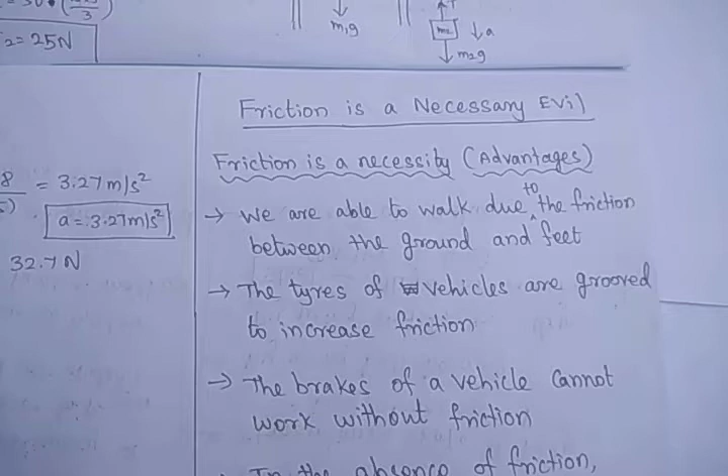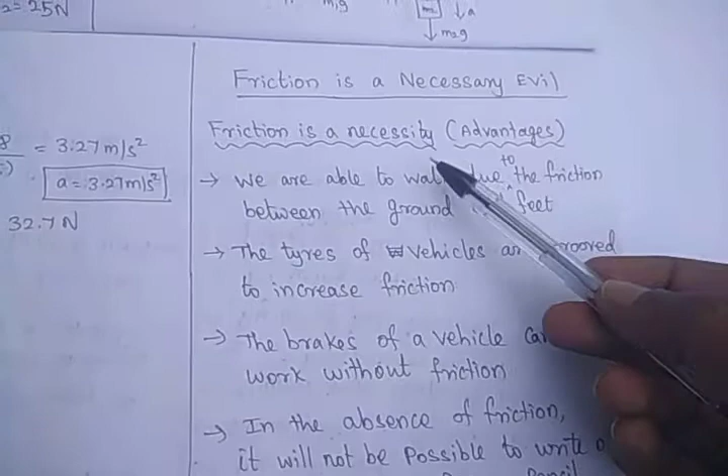Friction is a necessary evil. So today's topic is we are going to see the advantages and the disadvantages of friction. Friction is a necessity. What are all the advantages? We are able to walk only due to friction. There will be friction between the ground and our feet.

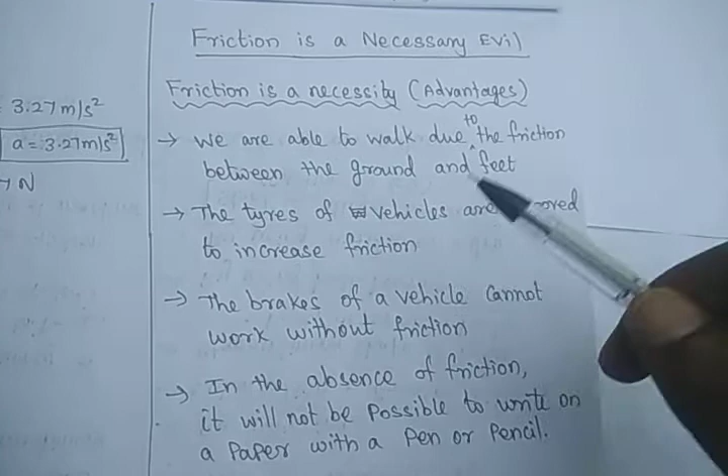Then the tires of the vehicles are grooved. Why are there designs drawn in the tires of the car or cycle, whatever it is? In order to increase the friction between the road and the tire. The brakes of the vehicle cannot work without friction. So if there is a smooth surface, there will be no friction.

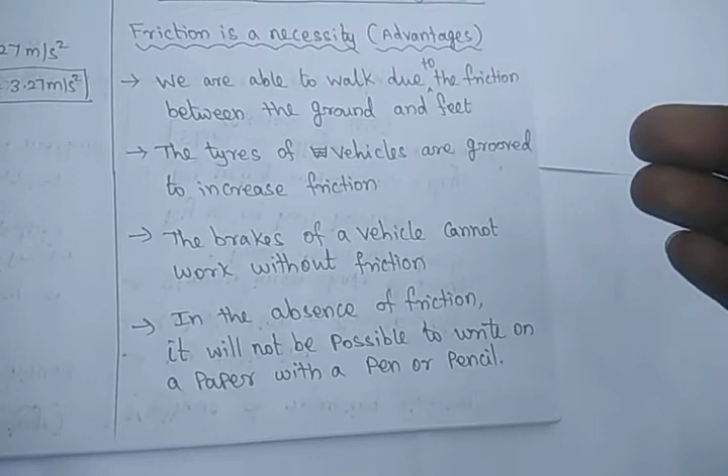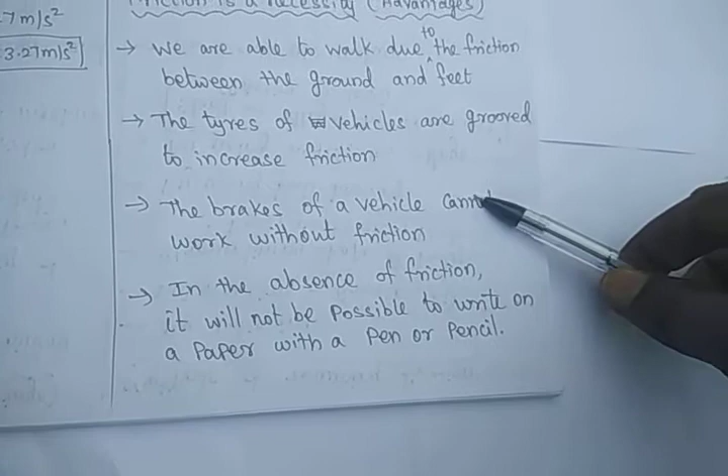Then finally, in the absence of friction, it will not be possible to write on the paper with the pen or pencil. If I write here, there should be friction with this ball. This is a ballpoint pen. The ball is rolling, and from the rolling the ink will come out.

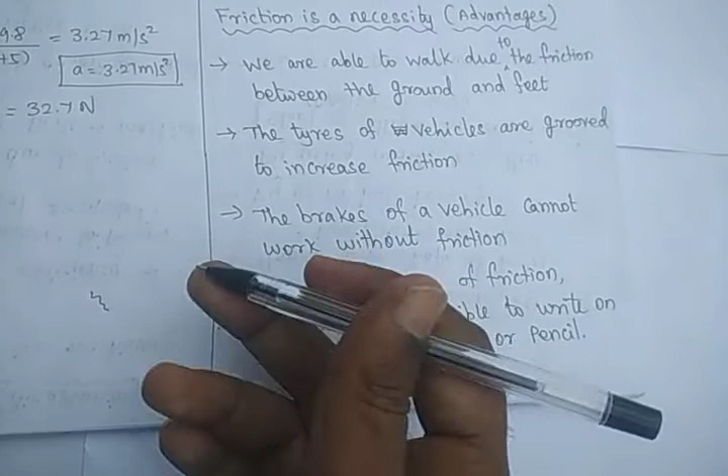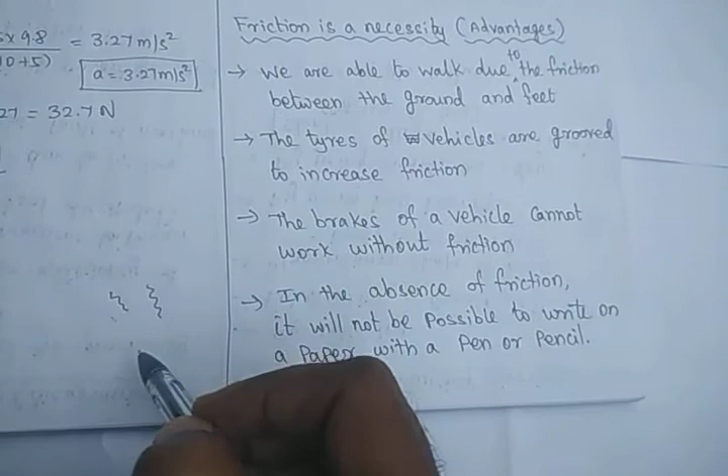So there should be friction between the paper and the pen tip or the pencil tip. Otherwise, we are not able to write on the paper. If it slips, it will always be sliding, and we are not able to write what we wish on the paper. So these are all the advantages of friction.

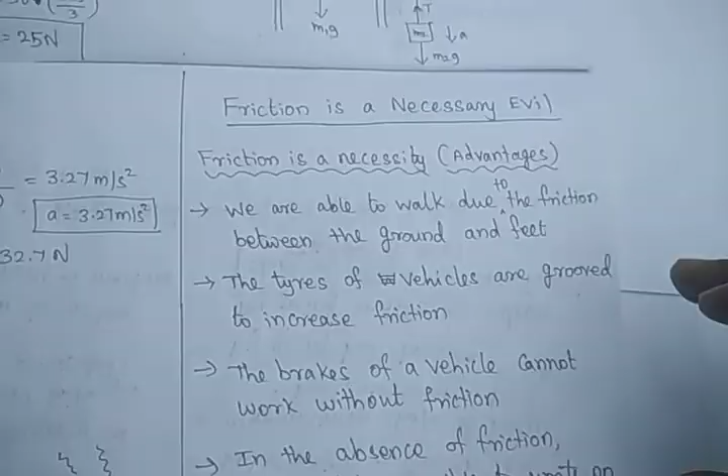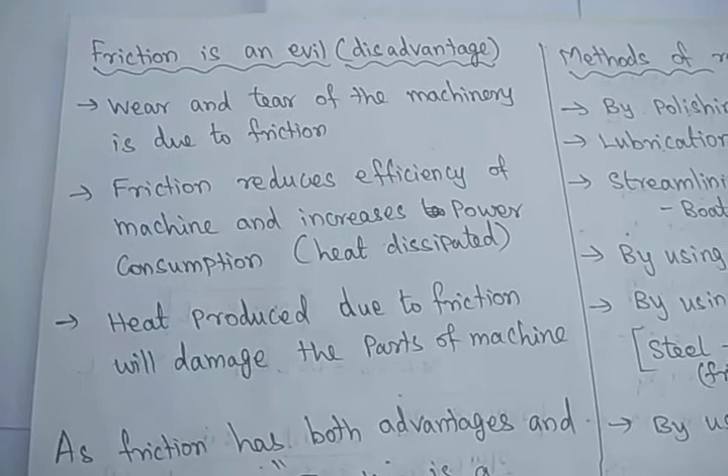Then friction is an evil. Disadvantages: the wear and tear of machinery is due to friction. Sometimes friction also reduces the efficiency of the machine and increases the power consumption. This is due to the heat production when two surfaces rub. The heat produced due to friction will damage the parts of the machine.

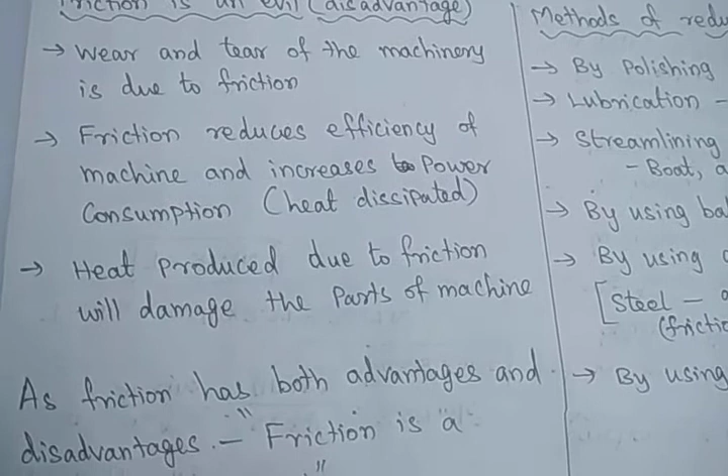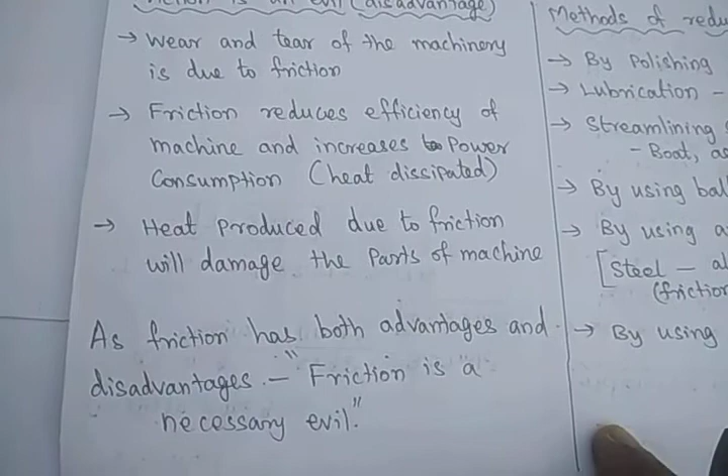If you walk for a long time, the soles of our shoes will wear off because of friction. So as friction has both advantages and disadvantages, we can say that friction is a necessary evil. Then how to reduce friction? Methods of reducing friction.

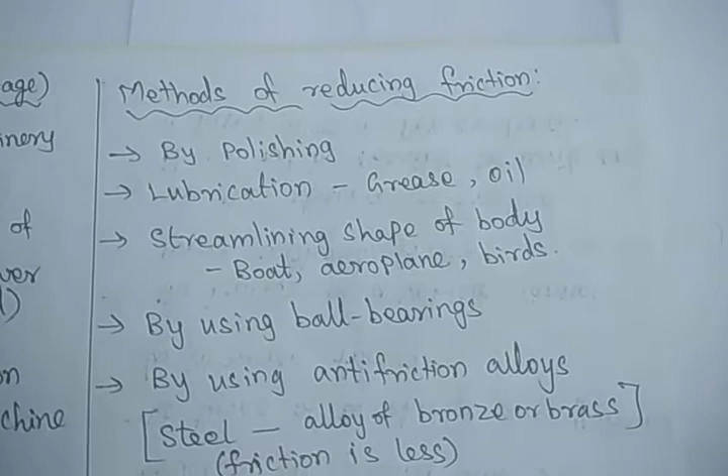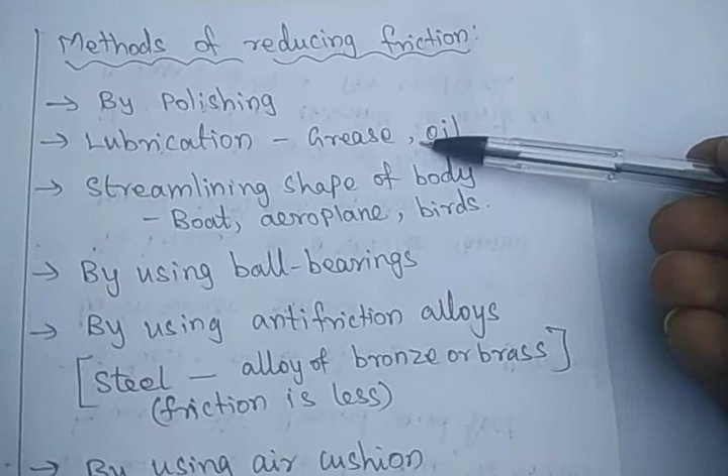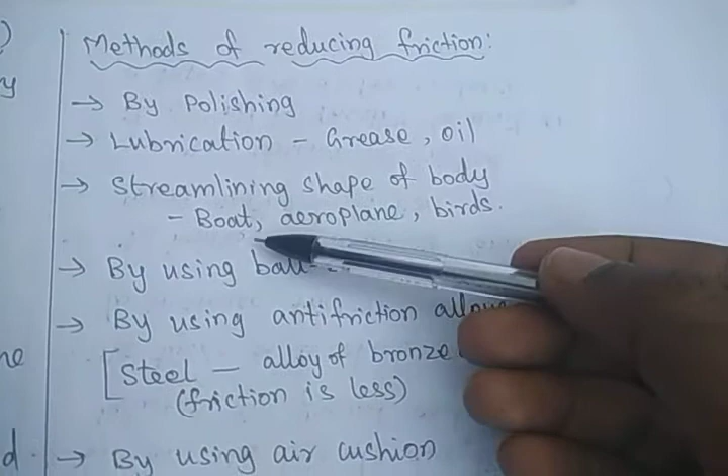If you are using a polished surface, friction may be reduced. If you are using lubrication, grease or oil, so in automobiles or any machines, we use oil to reduce friction and also reduce the noise produced by the machines. The streamlined shape of the body: the boat, aeroplane, bird shape, all will be like this. It will be a streamlined shape.

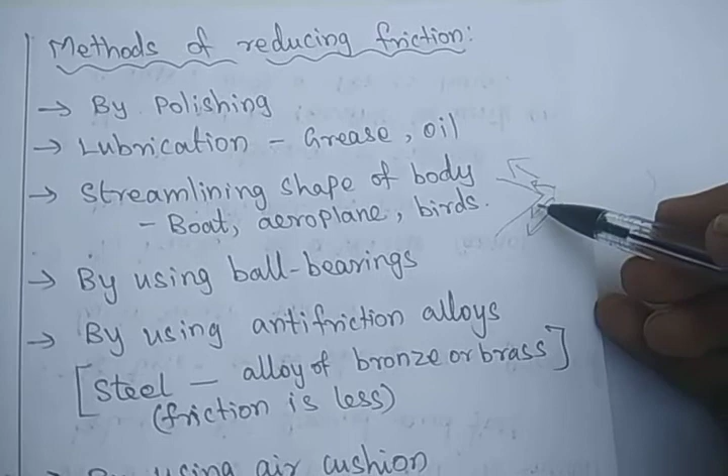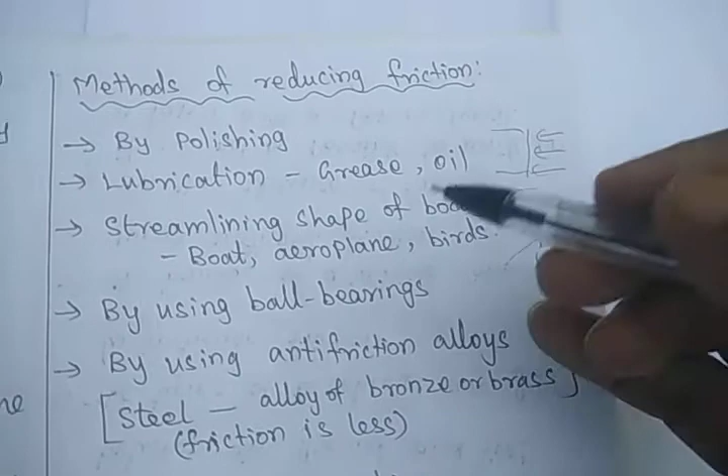So whenever the air flows over this one or the water flows past the boat, it will reduce friction. If we have the boat shape like this, what will happen? The water will act in this direction, so the opposing force will be more. We have to supply more fuel to move the boat. Hence the boat shape will be like this and the aeroplane shape will be like this. That is a streamlined shape of the body.

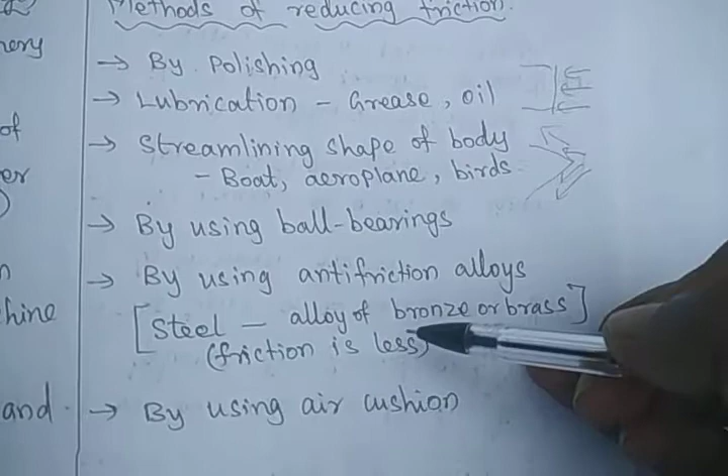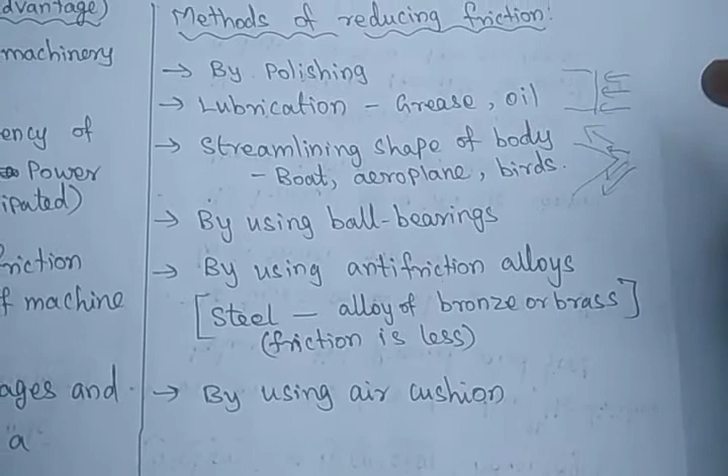Then using ball bearings. You are able to see that suitcases have small rollers. So what will happen? The rollers will reduce friction, and you also see ball bearings in many machines to reduce friction. Using anti-friction alloys.

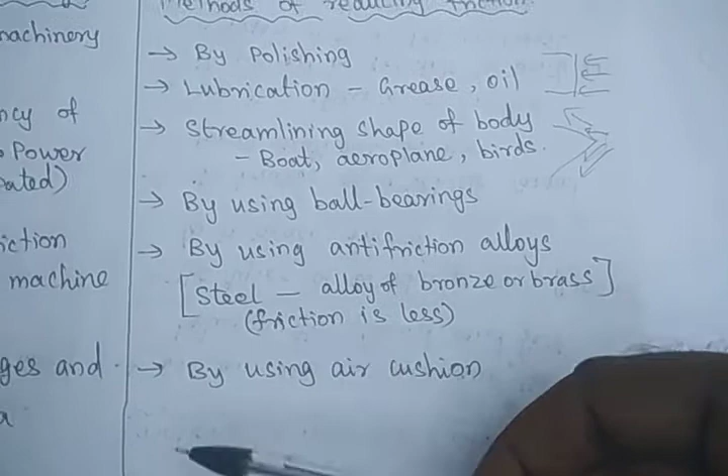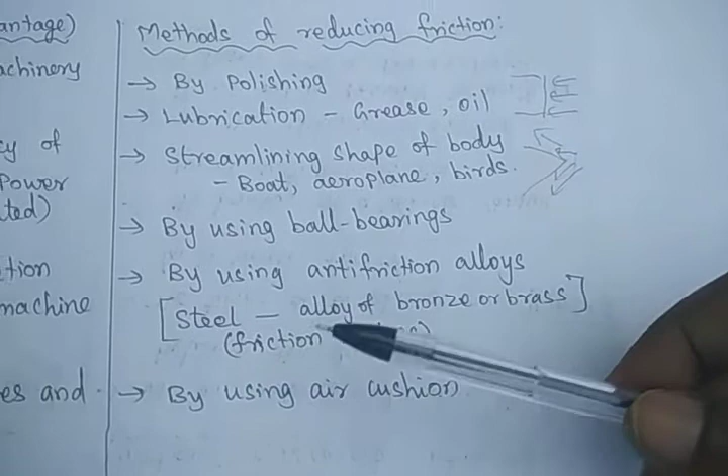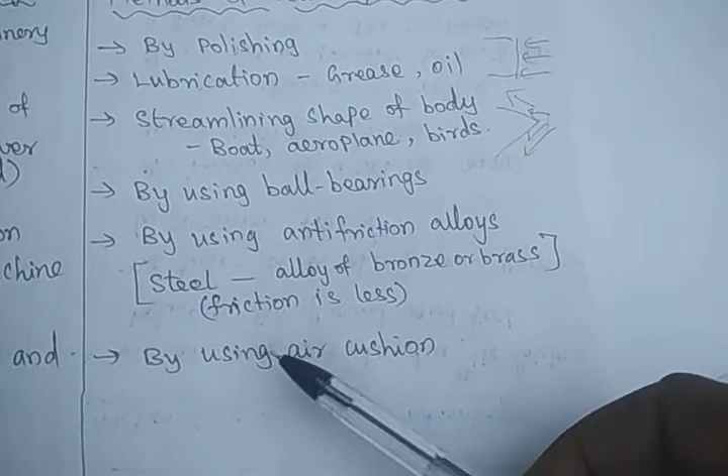If steel rubs with steel, the friction is more. In other words, if steel and an alloy of bronze rub with each other, the friction is less. Hence, if machinery parts are made with steel, another part in contact with the steel part will be made of an alloy of bronze or brass. By using an air cushion, the air cushion also reduces friction. These are some methods of reducing friction.

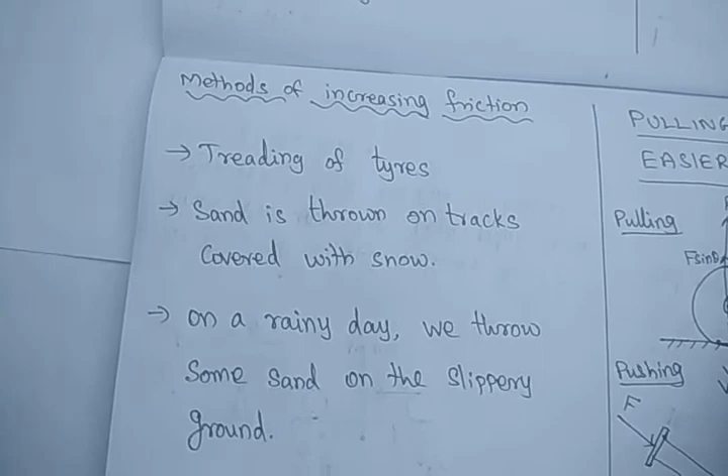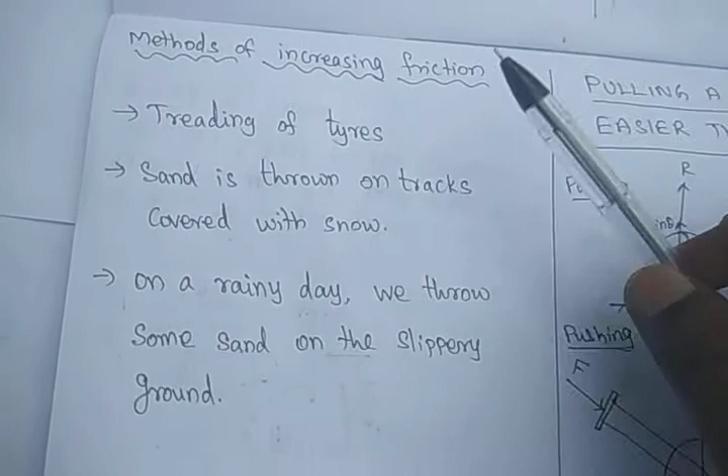How can we increase friction? Sometimes we need more friction in order to do our daily activities. Treading of the tires: I am showing that some designs are drawn in the tires of two-wheelers or cars or cycles to increase the friction between road and tires. The irregularities between the two contact surfaces are called friction. Hence, we need treading of the tires.

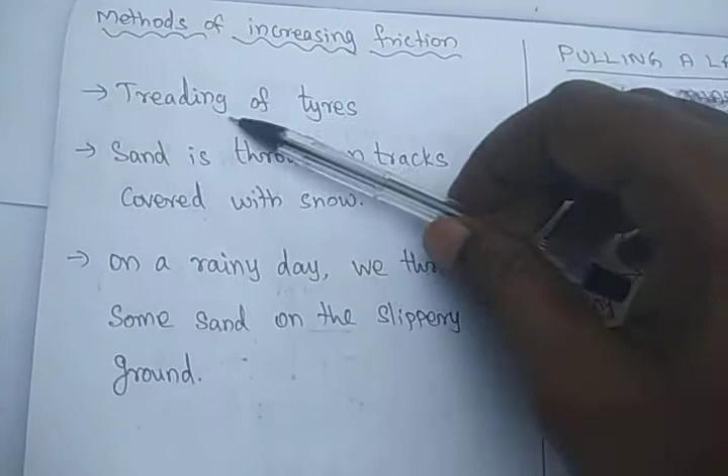Sand is thrown on icy tracks. In colder countries, they throw sand on the snow.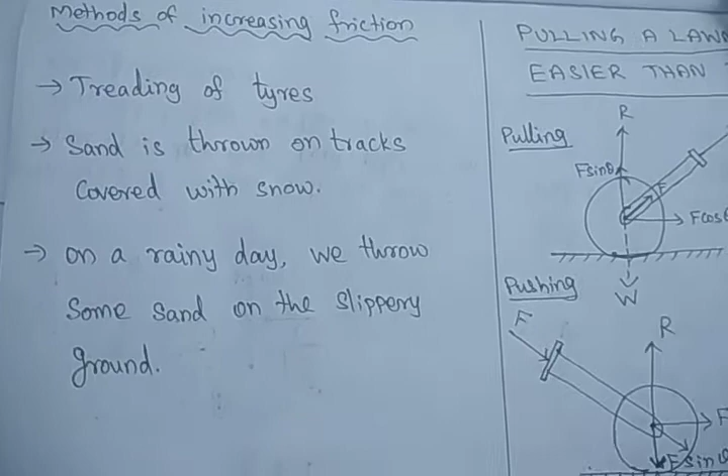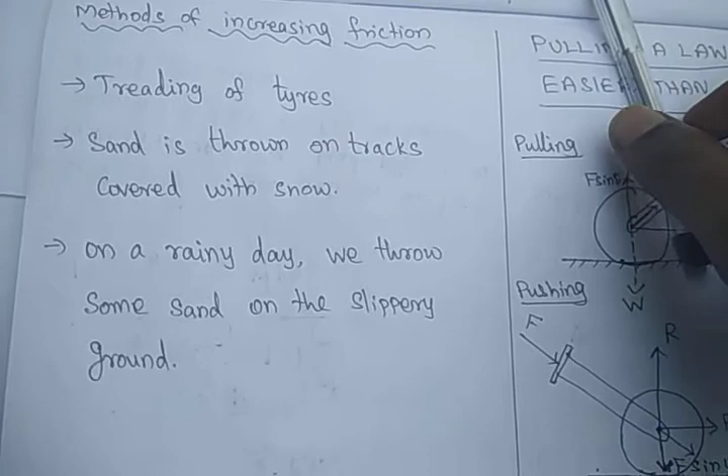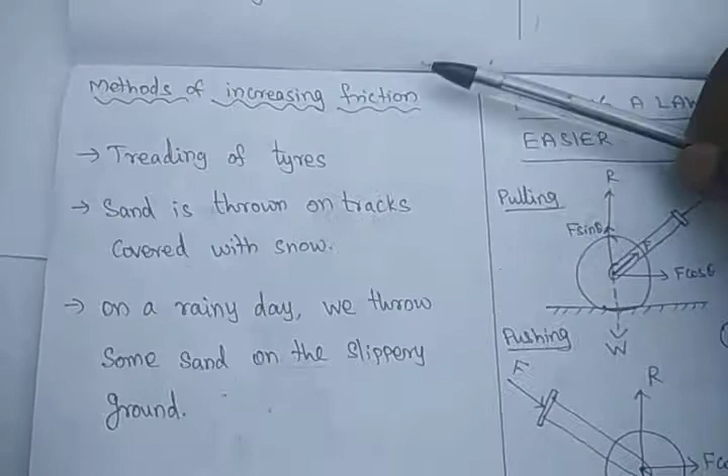Then only they are able to walk on the snow surface. On a rainy day, we throw some sand on the slippery ground. Even you are able to see that in playing a carom board, we are sprinkling some powder on the carom board in order to increase the friction, because it will slide. So these are the ways we increase the friction. So there are different ways to reduce the friction as well as to increase the friction.

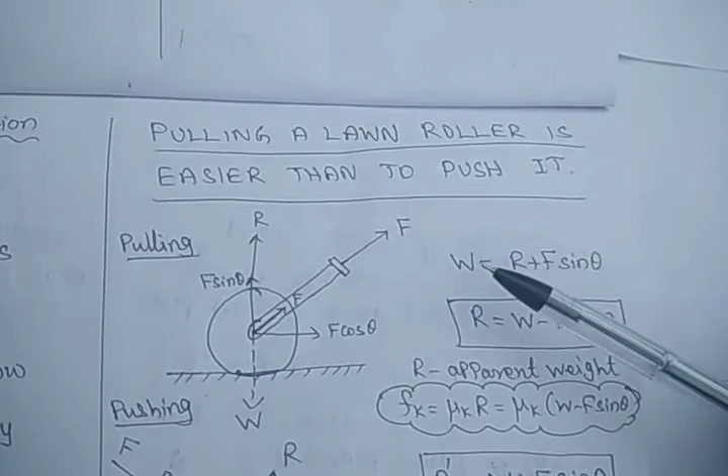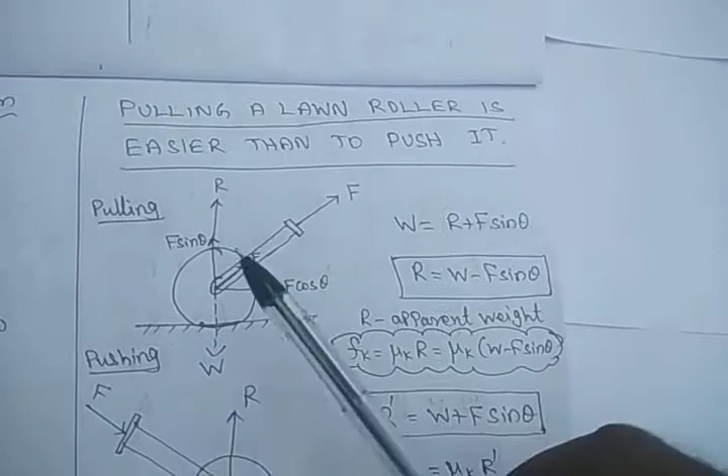So next is: pulling a lawn roller is easier than pushing it. So very simple. Which one is easier? Pull or push is called a force. Is pulling easier or pushing easier? That is what we are going to see now. So this is a lawn roller. You know what a lawn roller is? We see it in our ground. There is a roller which is used to make the pitch of the ground flat. So this is a roller.

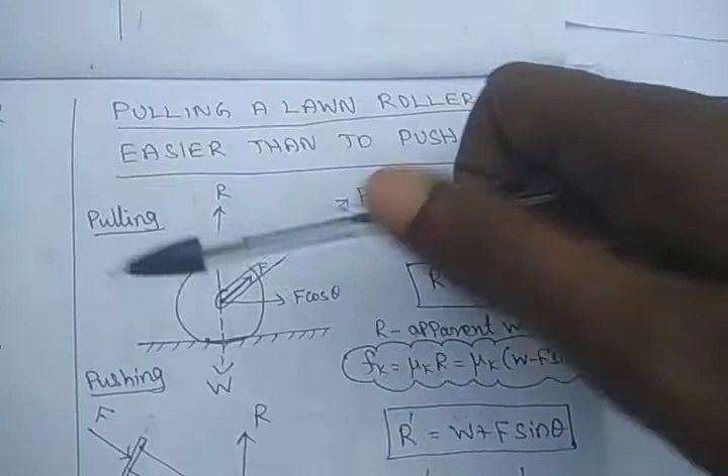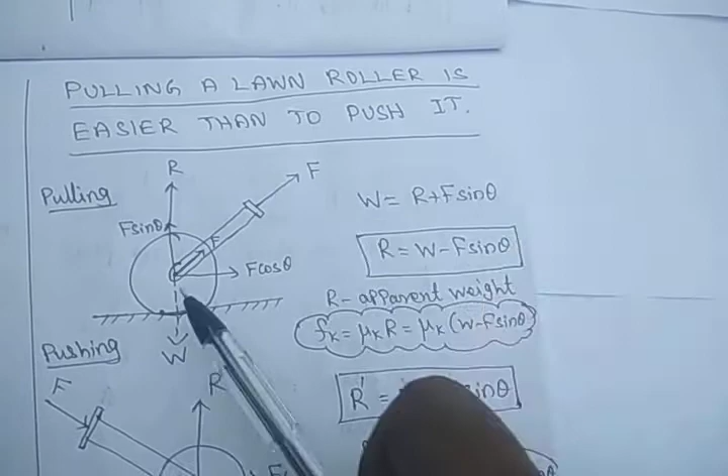This is a handle. So what are we doing? We are going to pull the roller, not push it. We are going to pull the roller in this manner. So this is the applied force in this direction. The applied force has two components, horizontal component and vertical component. Horizontal component is F cos theta and the vertical component is F sin theta. But this roller has a weight W which is acting in the downward direction.

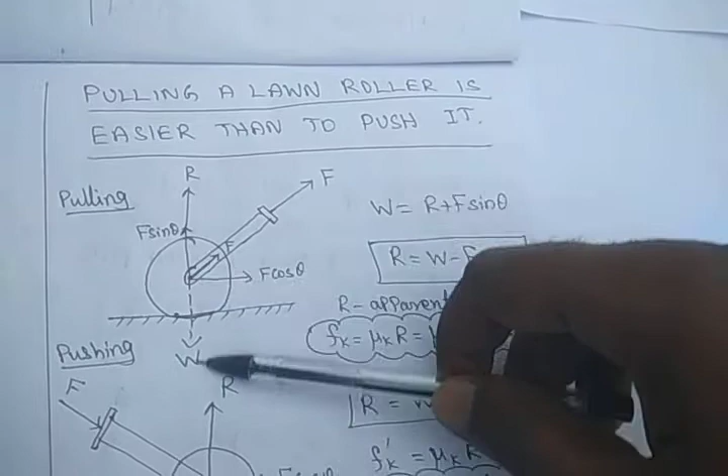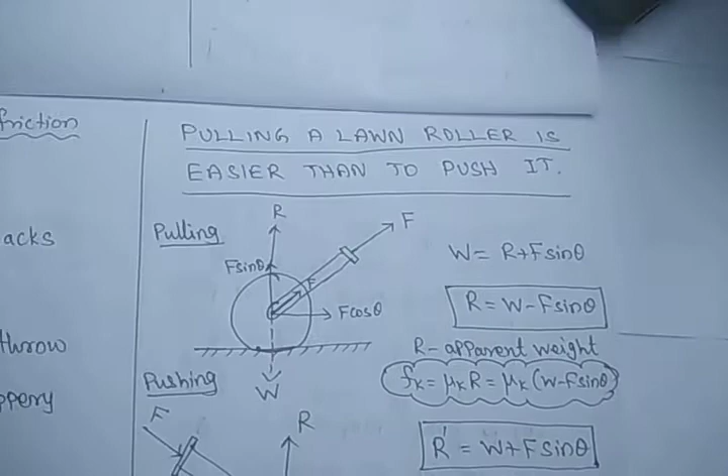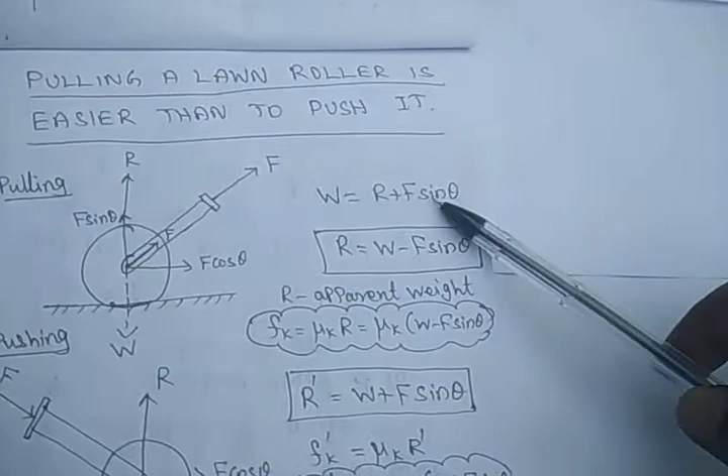Actually, whenever there is a weight mg acting downwards, there will be a normal reaction force R acting in the upward direction. So normally there is a weight acting downwards and normal reaction in the upward direction. Here we are going to pull the lawn roller in this direction making an angle theta. So the horizontal component, vertical component. If you see, the weight of the roller W will be equal to the sum of R plus F sin theta. W is equal to R plus F sin theta. R is equal to W minus F sin theta.

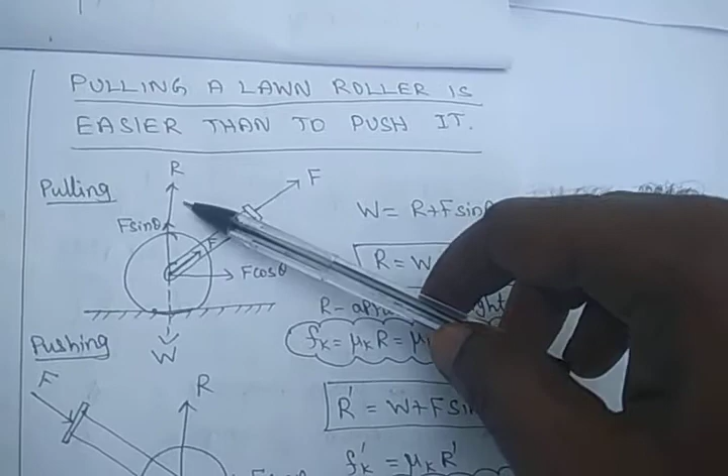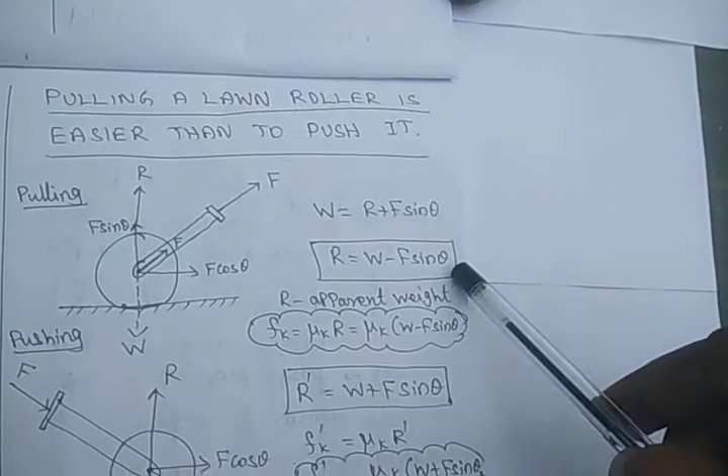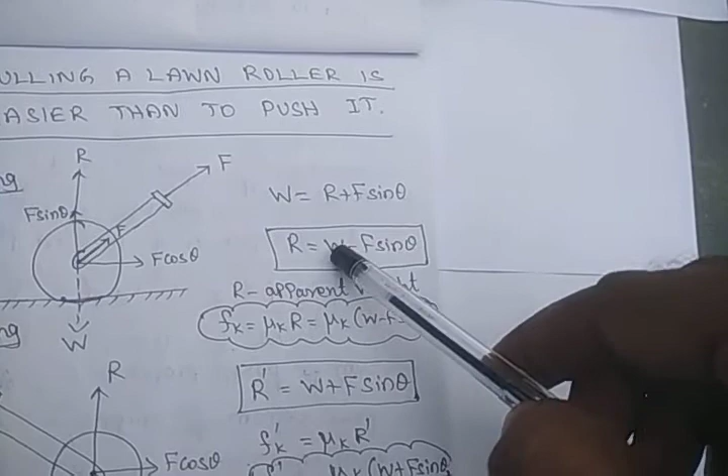What is this R? This R is equivalent to the apparent weight of the roller. That is what we are experiencing when we are pulling the roller. We are experiencing some weight of the roller. You know that the roller weight is equal to W minus F sin theta. So this clearly shows that the weight of the roller will be reduced. Some factor will be subtracted. So actually, the weight we are experiencing here will be reduced.

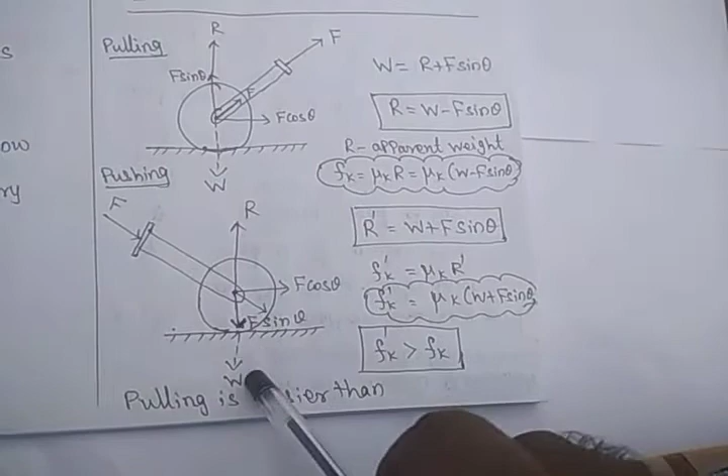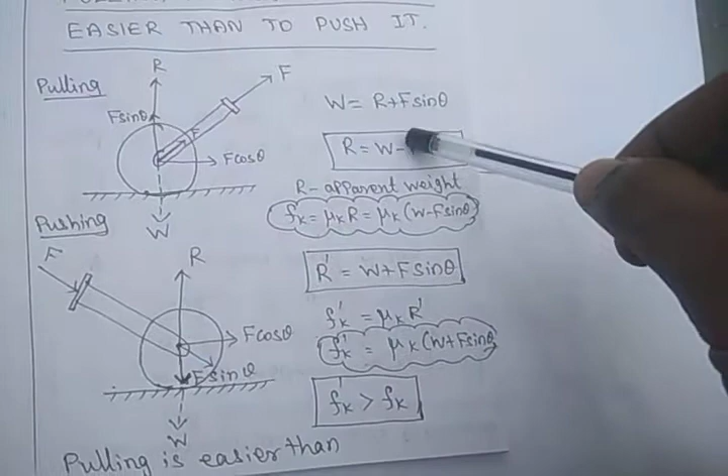In the other case, while pushing, so this is pushing, we are pushing the roller like this, then what will happen? The F cos theta and F sin theta will go like this. So W plus F sin theta is equal to R. So what will happen? There will be addition of weight. Here, the reduction of weight. Hence we say that pulling is easier than pushing. Pulling is easier than pushing.

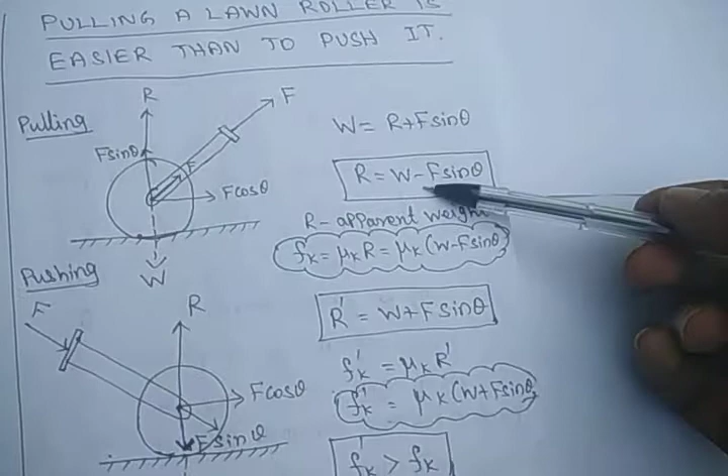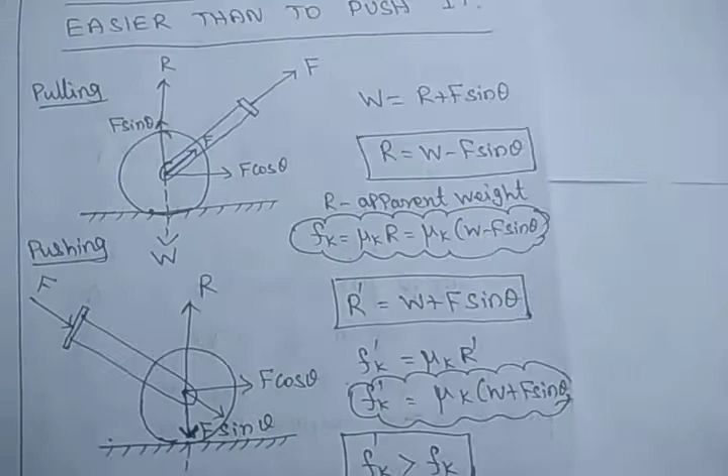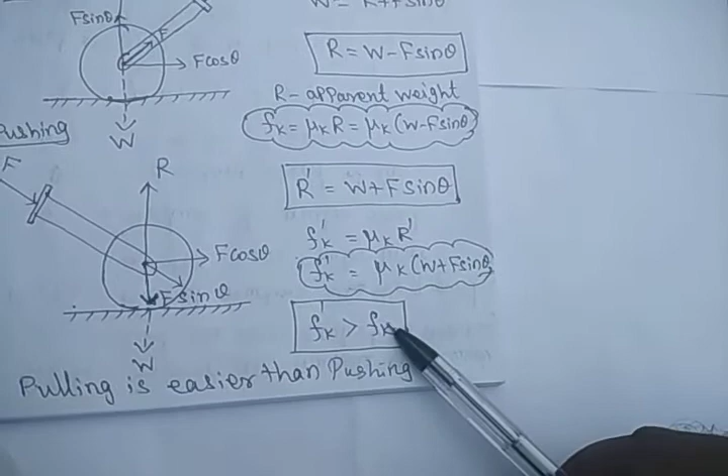In terms of friction, we are saying that Fk, that is the kinetic frictional force, is equal to mu k into R, which is the coefficient of kinetic friction into the normal reaction. Then substitute R here in mu k R. What will happen? For pushing, the kinetic friction is more than the kinetic friction for pulling. So very evidently we can say that pulling is easier than pushing.

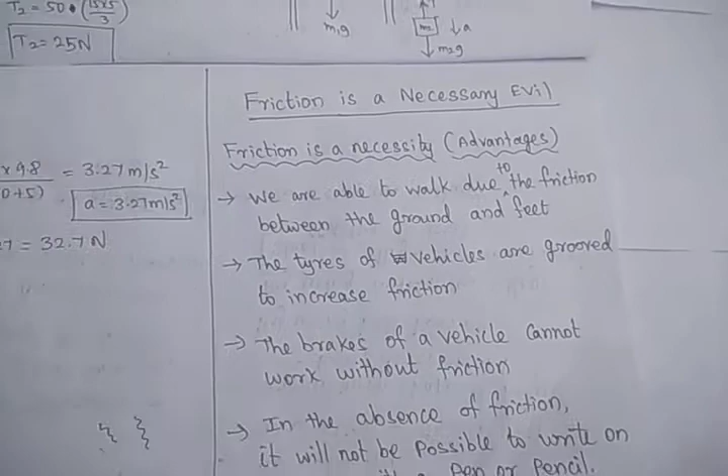Yes, students, in this video we have seen the advantages of friction, the disadvantages of friction, the methods to reduce friction, and also the methods to increase friction. Finally we discussed whether pulling or pushing is easier. We come to the conclusion that pulling is easier than pushing.